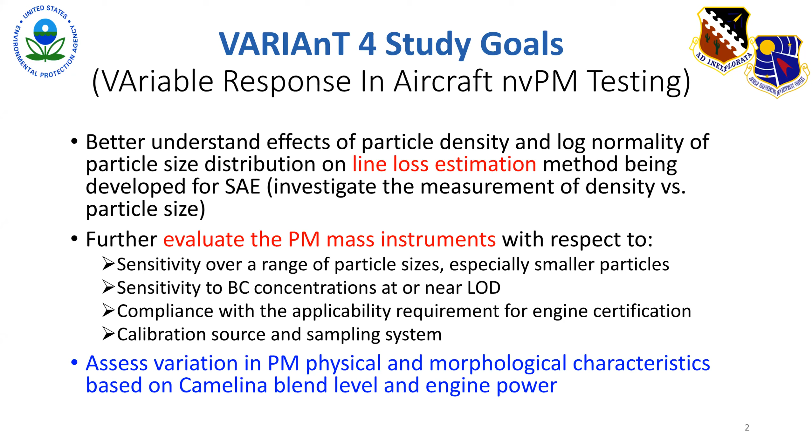They have a couple of measurement goals in terms of line loss estimation for SAE determination purposes, as well as evaluating mass and PM mass measurement instrumentation. Our goal here in our work was on assessing the variation in PM physical and morphological characteristics for biofuel blends as a function of engine power. And so we looked at the elemental carbon emissions, strictly speaking, size, variation, and nanostructure.

By way of brief outline, we'll talk about postulated fuel compositional impact on particle formation processes. That's the broad overview, but look at some varied experimental observations and try to formulate a singular rationalization for their collective observation. So we looked at aggregate size correlation with engine power, primary and aggregate size correlations, as well as fuel compositional impacts, both upon elemental carbon and effects on particulate formation, chemistry, and nanostructure.

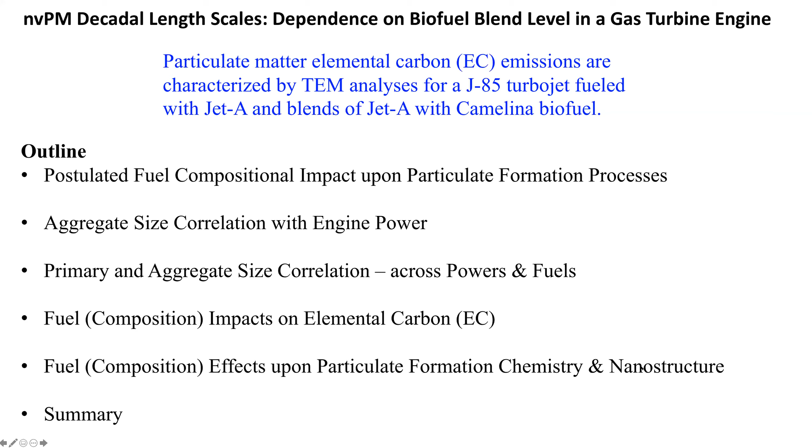So this was not a turbofan, to be clear. It is a turbojet, a J85 combustor. And we looked at the nvPM across multiple length scales. That's the reason for the decadal length scales, because we looked at the aggregate size, primary particle size, and the nanostructure within the particles. Each of those length scales bears relevance to its health and/or environmental implications.

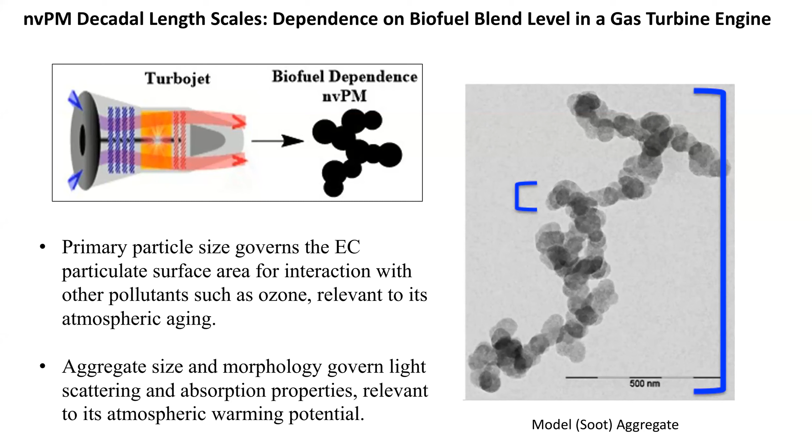Namely, the particle size itself governs the surface area, which is relevant for atmospheric aging of the particulate, versus size and morphology both govern light scattering and absorption. I'll not go into the health effects here. That's a separate study. So the panel on the right-hand image is showing you basically a real TEM image of the aggregate as we saw these.

Most of the particulate was collected on thin carbon films. That's the background that you see. And again, we looked at aggregate structure, primary particle size, and nanostructure within the primary particles. And so that's where our measurements, observations, encompassed roughly 3 orders of magnitude.

In terms of analyses, we applied TEM and image processing, whether it be ImageJ for primary aggregate or our custom algorithms for the nanostructure quantification per se. Sample sizes were significant in terms of a few dozen TEM images for each power fuel condition and/or hundreds of measurements within any given condition set. The fuels were Jet A and/or blends with hydrotreated camelina biofuel.

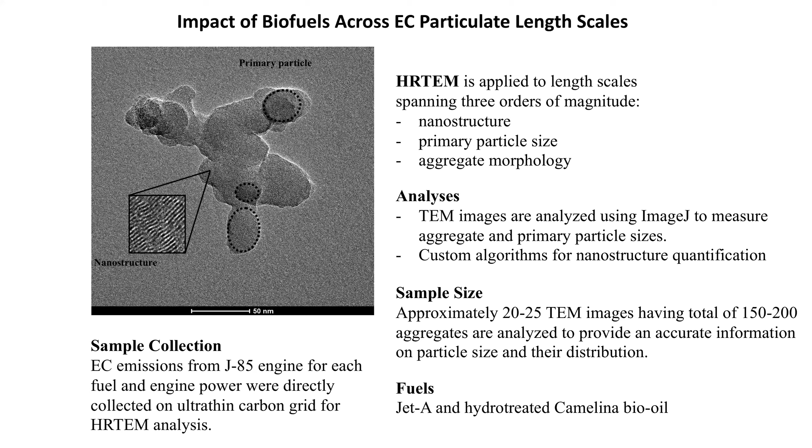The diagram on the left-hand side is the basis or the descriptor for our postulate that basically in the very high turbulence of a jet combustor, the fuel-air mixing competes with the kinetic timescales. Specifically, that is to say the physical mixing timescale, if you will, of fuel-rich regions with air compete with the kinetic timescales for fuel pyrolysis reactions.

The significance of that competition relates to the particle formation processes, in particular for each of the 2 fuels. A fuel laden with roughly 20-21% aromatics, such as Jet A, is primed for soot formation. It has the requisite aromatics to already start particle nucleation and/or then growth from those same aromatics. That's shown on the left part, versus the biofuel, devoid of aromatics per se.

Necessarily, to produce those aromatics, the fuel itself, alkylparaffinic molecules, need to undergo various pyrolysis reactions to produce unsaturated species, namely acetylene, to produce the first aromatic ring. So there's a whole set of pyrolysis reactions, aromatic formation, prior to the start of particle nucleation and/or then subsequent aggregation of those primary particles. And so that is the difference, we believe, that collectively explains the observations that I will next present to you.

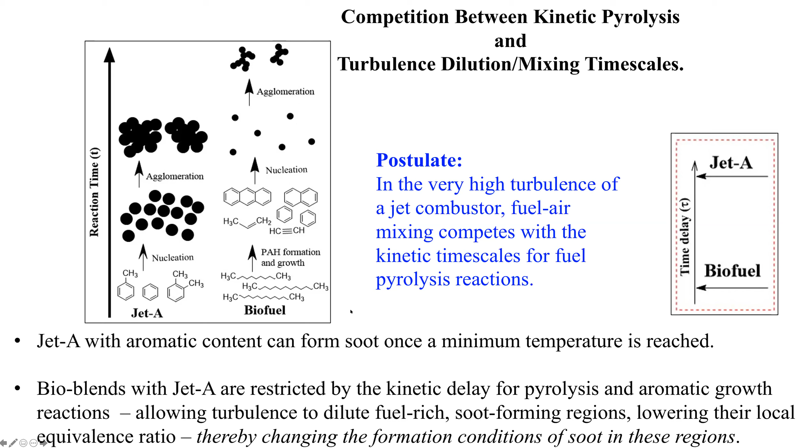So to start with a more macroscopic view, larger scale, looking at the aggregate size. As I mentioned, there are a few dozen for any given fuel power condition, but these are a series of representative aggregate images for Jet A, 30% blend or a 70% blend. And you can see the general trend that with increasing biofuel blend content, there's an overall decrease in size of the aggregates. There's also a change in terms of the structure, although that's a little bit harder to see, that with a higher blend fuel, there are fewer primary particles per aggregate.

In principle, we believe that the lower number concentration of primary particles associated with the aromatic dilution of the fuel leads to a decreased rate of coalescence. Strictly speaking, in aerosol science, that should lead to a more dendritic aggregate, but that's a little bit offset here by the fact that the aggregates in panel C are somewhat smaller as well.

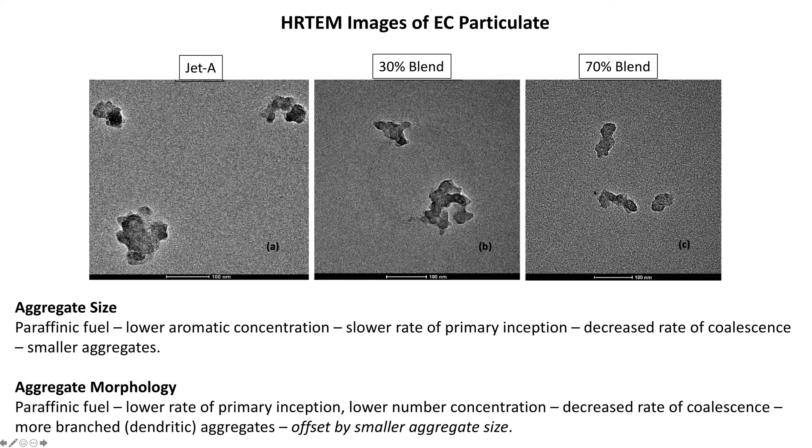This graph is showing the trend of aggregate size quantified from those images for the different biofuel blends and compared to Jet A as a function of engine thrust. As you can see, the red to blue to green, there's a decreasing slope. What that decreasing slope represents is a decreasing dependence of aggregate size upon engine thrust with increasing biofuel blend.

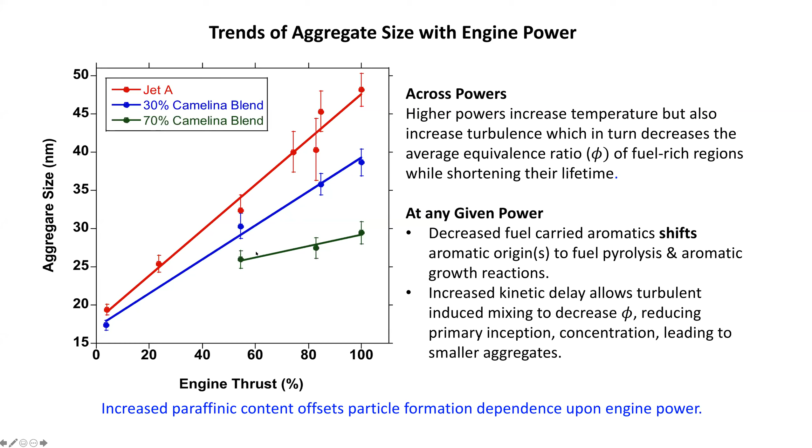Also, you can see for any given engine thrust, there's a decreased average aggregate size with increasing biofuel content, not surprisingly. But the idea is that with dilution of the fuel-carried, fuel-borne, that is to say, aromatics, there's an increasing shift of dependence on aromatic formation from the fuel pyrolysis itself, leading to that decreased dependence then upon engine thrust.

A different correlation would be between primary particle size and aggregate size. There's not, strictly speaking, an inherent fundamental correlation between these two physical measures or length scales. It does suggest, however, that for both Jet A, the 70 and 30% camelina blended fuels, that there's an underlying cause factor that leads to this correlation between these two different length scales. Namely, I'll suggest the fuel aromatics.

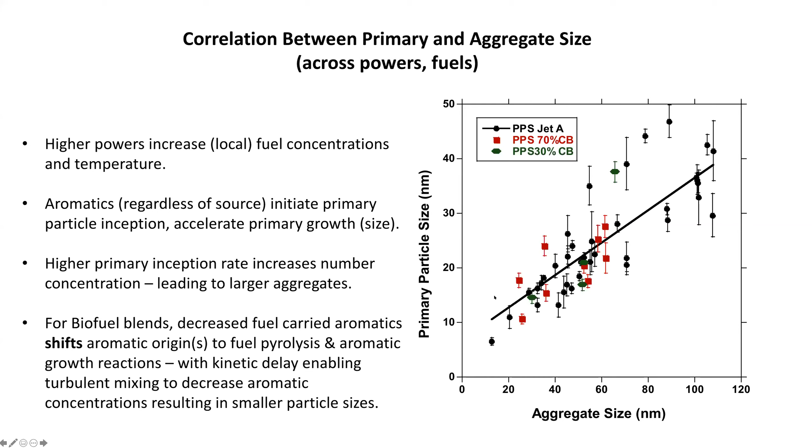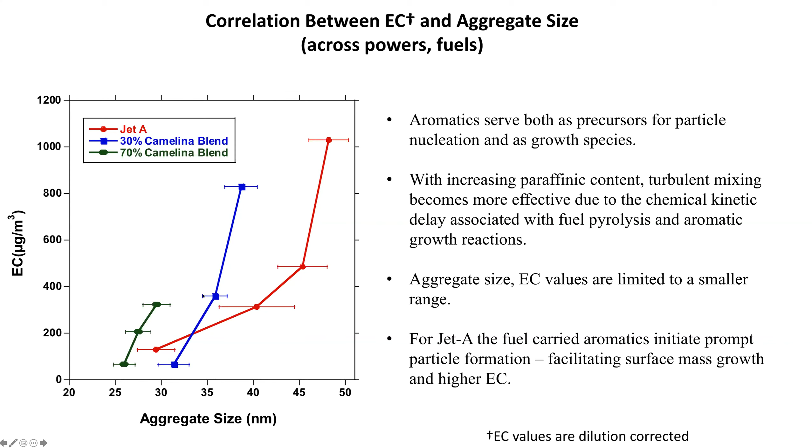But you can see that with increasing biofuel blend content, there's not near as large a range of aggregate size, but nor is there a strong dependence. There's a lesser dependence of EC upon aggregate size. But there's a similarity of the slope at higher thrust associated with Jet A versus the entire span for the two biofuel blends, suggesting that the same physical processes are leading to the aggregate formation and/or aromatics for each of these two fuels associated with aromatic formation.

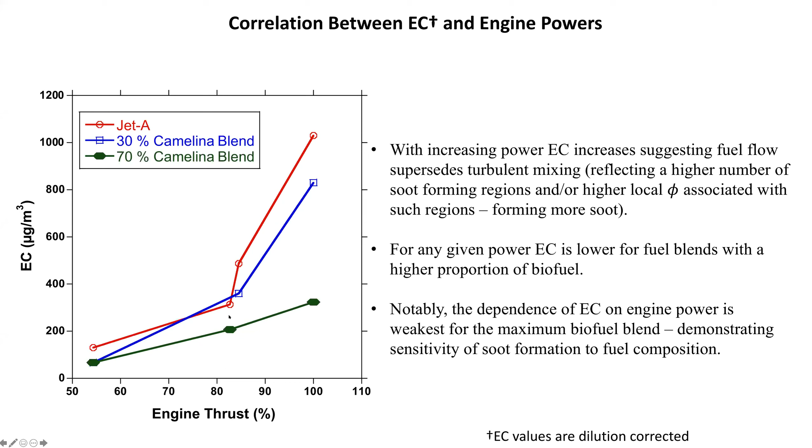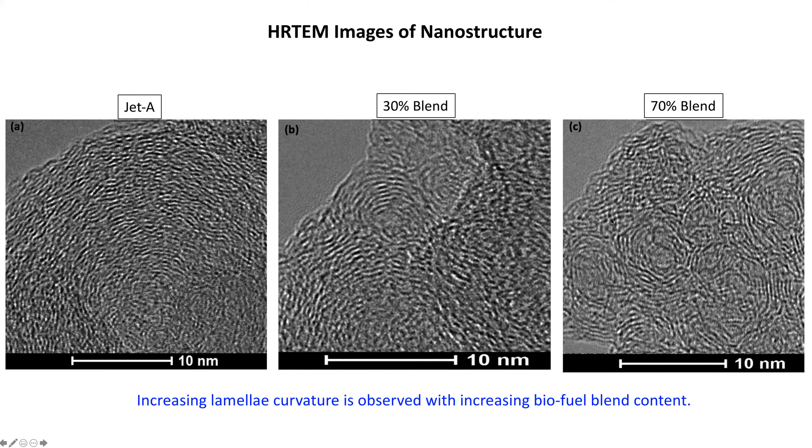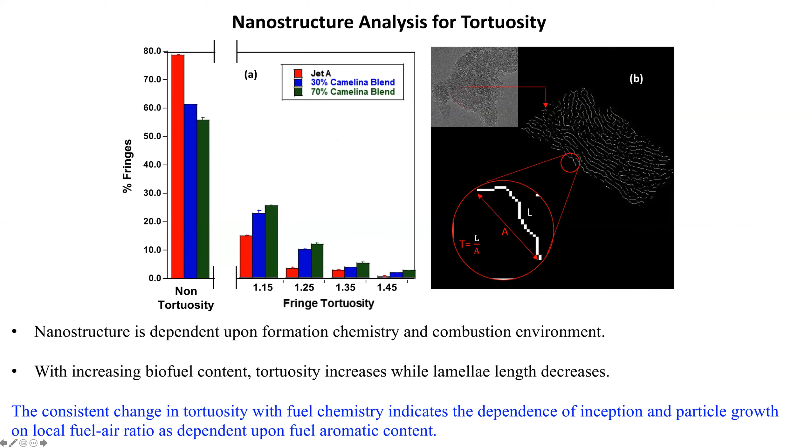And you can see that for green to blue to red actually, there's a distribution of tortuosity, but the fuel that exhibits the most tortuosity across bends is that with the highest biofuel blended content, or in other words, with increasing biofuel blend content for any given bend category, there's an increasing degree of curvature, that being what I said in the previous slide. And so, again, we believe this change in the fuel chemistry is manifested not just in aggregate size, not just particle size, but also nanostructure as well.

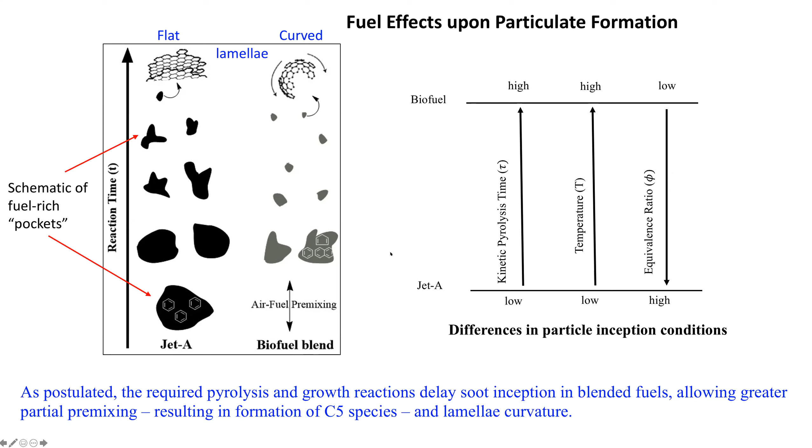And so the conditions under which soot formation occurs in the biofuel blend case compared to the Jet A case are different. They are different not only in the temperature, but they're also significantly different in the equivalence ratio, allowing for dilution by turbulent mixing. That dilution is significant because basically it suggests that it's not a fuel-rich pocket per se. It strictly is, yes, but it also means that the soot particulate is forming under partially premixed conditions. Those premixed conditions can, in fact, then lead to the C5 and the resulting curvature that we see in the nanostructure. So we performed Chemkin calculations to try to verify that supposition.

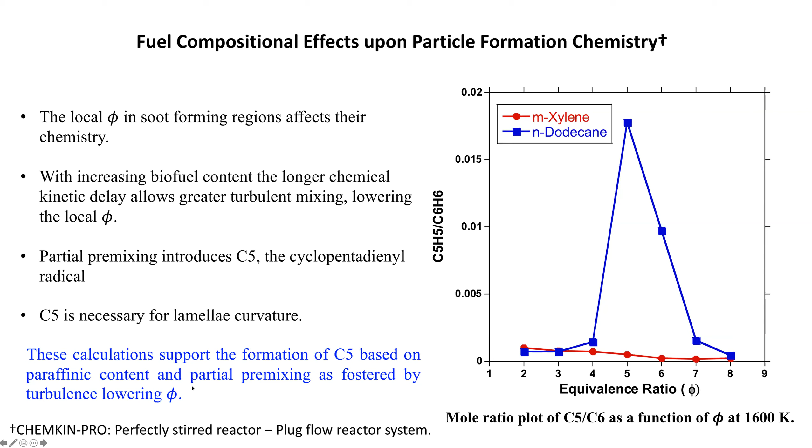And what you can see is that the C5 to C6, C5 being that necessary entity for curvature in lamella, there's a strong dependence upon equivalence ratio, not for the aromatic, but for the paraffinic, suggesting and supporting then that the formation of C5 is based on paraffinic content and partial premixing, again, fostered, promoted by the turbulence, competing with pyrolysis kinetics. Basically the soot from the biofuel across multiple length scales is showing the manifestation of that partial premixing.

So that brings me to a few summary points. For the slides that I've shown you, the observations: aggregate size increases with power, dependence is lower for the biofuel, and for any given power, the aggregate size decreases, as does the primary particle size. Both of those, aggregate and primary particle, are correlated, but the HRTEM analyses also show fringe tortuosity increasing as a measure of curvature with increasing biofuel content.

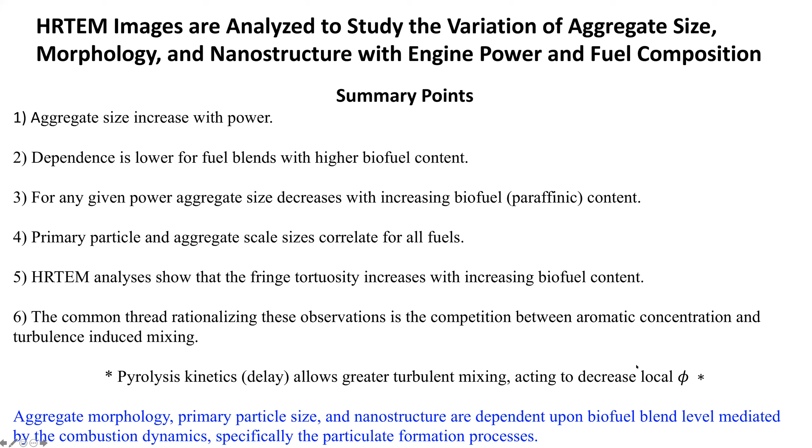But the common thread rationalizing these observations is that the aromatic concentration, requisite and implicit for particle inception and growth, competes with the turbulent mixing. So in other words, pyrolysis kinetics, when they are required, impose a delay, allowing turbulent mixing, changing the local phi under which the particulate forms.

To further amplify that point, as stated again here, increasing biofuel content is lowering the aromatic concentration of the fuel, that's clear, but it's placing an increasing emphasis or dependence upon fuel pyrolysis reactions to form the requisite aromatics for particle inception and growth. And so with increasing biofuel content, there's an increasing imposition, shall we say, of kinetic time delay for pyrolysis reactions, allowing more fuel-air mixing by turbulence.

So the fuel-rich soot-forming regions are still there. They may be fewer in number, but in general, overall, they're more diluted. That is to say that soot is forming under partially premixed conditions under lowered equivalence ratio. The significance of that is that there's a lower growth species concentration resulting in smaller primary particles, but also with lowered precursor, aka aromatic concentrations, the particle inception rate is lowered, meaning there's a lower number concentration, and as a consequence, aggregates then become smaller too.

But with increasing partial premixing, supported also by the ChemKin calculations, so too the nanostructure reflects this chemistry of partial premixing, of fuel-rich regions yet, promoted by the biofuel, leading to the curvature in the nanostructure across the different blend levels.